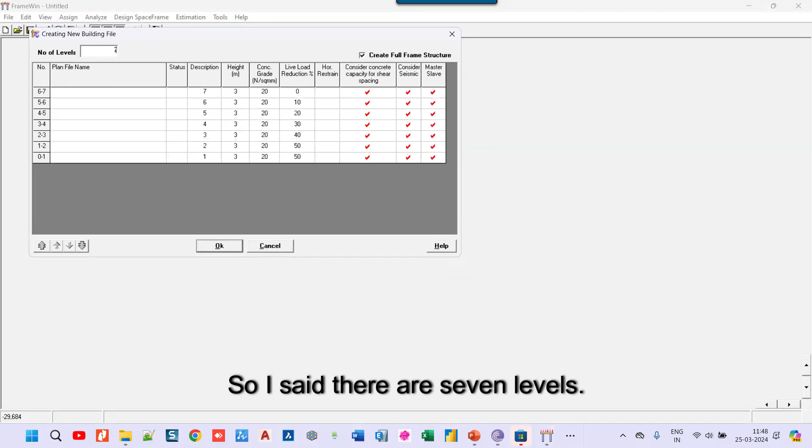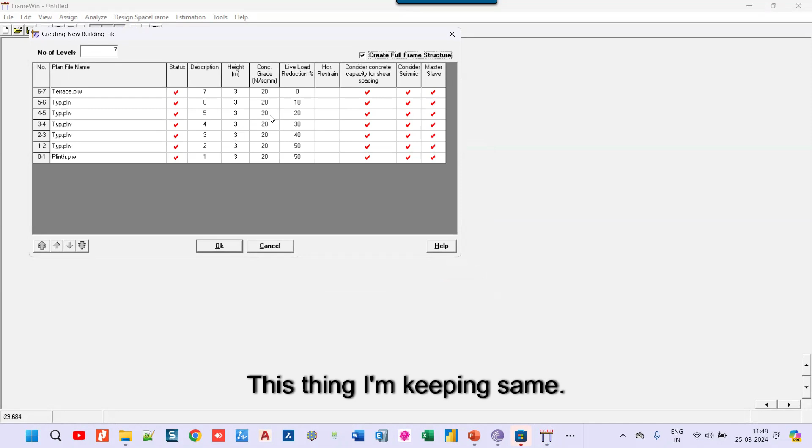I'm specifying to take the top level file from the terrace plan win file, and this one you take from typical, and copy it down all the way. For the ground floor, suppose I want to use this plinth level file. The rest I'm keeping the same. And you unmark this, create full structure, and say okay.

Now I'm giving a file name to this, so I say 'frame' - this is the file name I'm giving. So I'll see the plan, like plan at level 1. I can select and see at which level I want to view the plan.

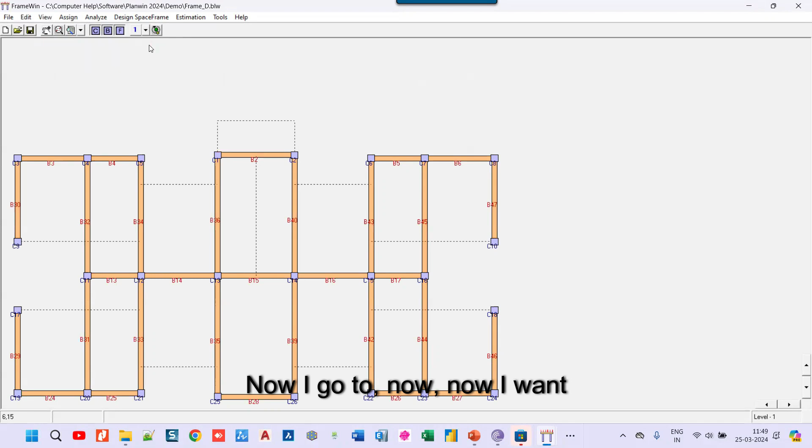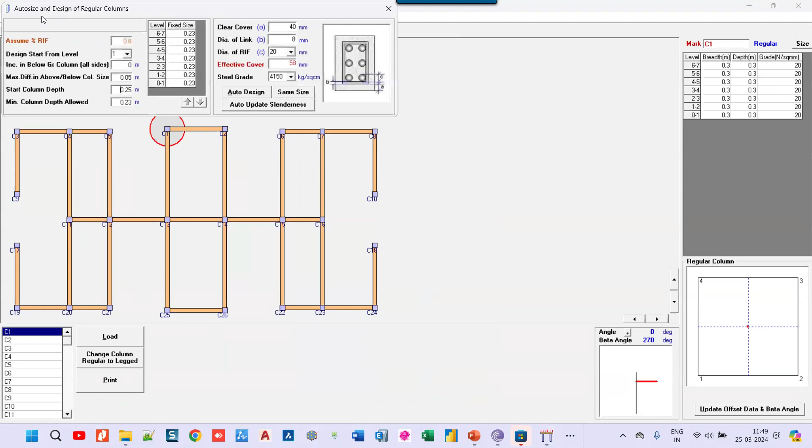Now I want to assign sizing of the columns, so I said assign column sizing. Initially, I want to base my column size on the vertical load. So I go to auto size, and suppose I'm using 0.8% steel to work out the size. Then I click on auto design, and the program works out the column sizes based on the vertical load.

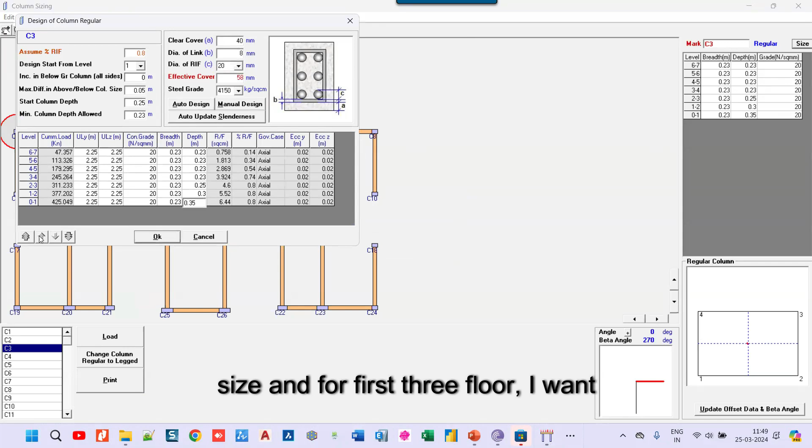Now suppose for this column I don't want the size to vary much. So I decide, clicking on the size, for the first 3 floors I want a size of 0.35, and for the next 3 floors I want a size of 0.3 meters. I click on this and click on up. Now it has created a file with first 3 levels at 0.35 and the rest at 0.3.

Now I can flush this column, clicking on this and this, so my column will become flush. Now suppose this column I want to have vertical orientation, so I click on this, and I want to flush at the top, so I do this.

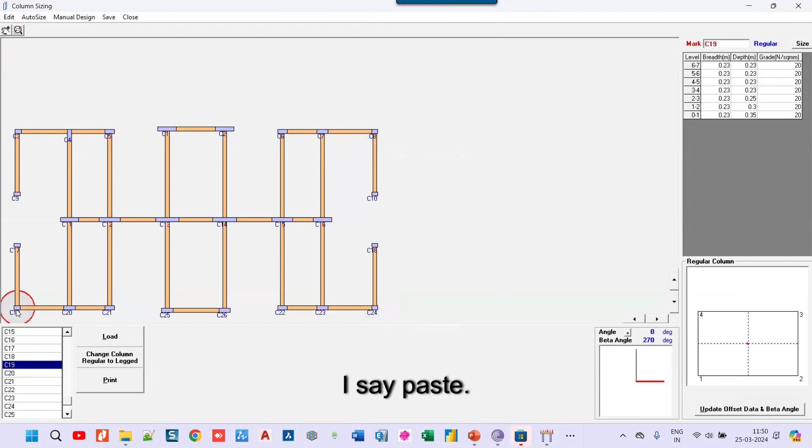Also suppose I want this column size copied to all the corners. So I right click, copy, then go here and paste, paste, paste. So for all these columns, my size has become what I set initially.

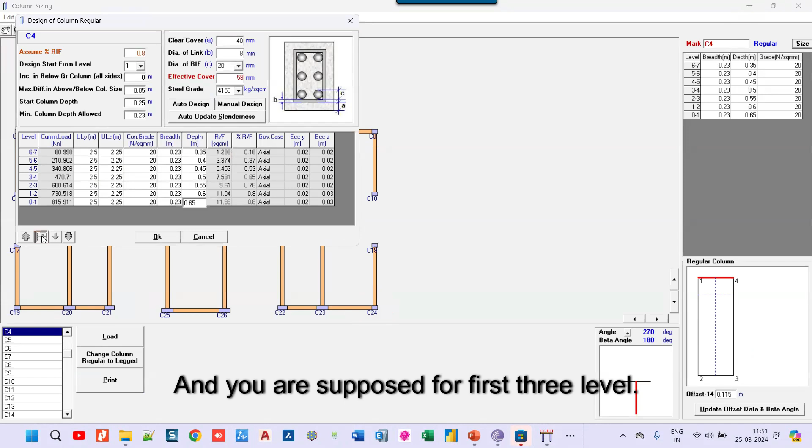Now here you can see these sizes are the same. Now for this column, again I click here and click on size, and for the first 3 levels I want a size of 0.65, and here I want a size of 0.6.

So okay, these sizes are fixed. Again I copy, paste, paste, paste. And here I want to change the direction, so I click here, place it on vertical, and say flush at the top. I click on this, click vertical leg, and flush.

Here also I want the same thing, so I flush it. Now here I want this column to be in this direction, so I'm flushing it here. And here I'm going to keep a shear wall, so I'm not changing any size here. And here again I want this to be flush on top, and for this column I want it flush at the bottom, so I'm clicking on it.

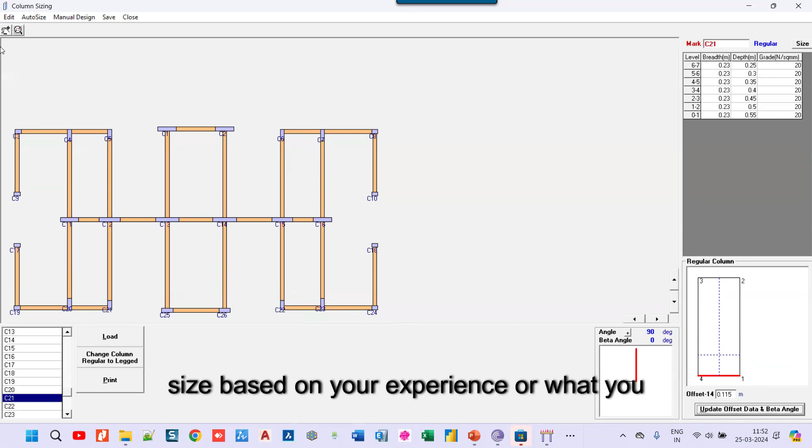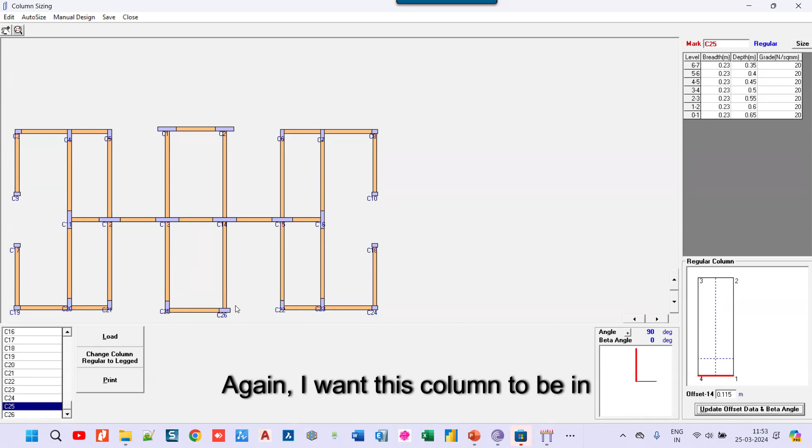So in short, you can change the column size based on your experience or what you want. Now here I want the column in vertical direction, so I click on this, click on vertical, and say okay. Here also I want it vertical, so I click on this. And suppose this one I want vertical too, so I click on this.

Again, I want this column in vertical direction, y direction sorry. This way I've flushed all the columns - this one in vertical direction, this one in y direction, this again in y direction. As soon as I click on this, I get the geometry and whatever I want, I set in this direction. So, okay, and suppose I want to flush it at the bottom or top, it's up to me, whatever I want.

So in short, you can change the direction, and even if you want to give your own sizing, you can do it. Once this is done, I said close.

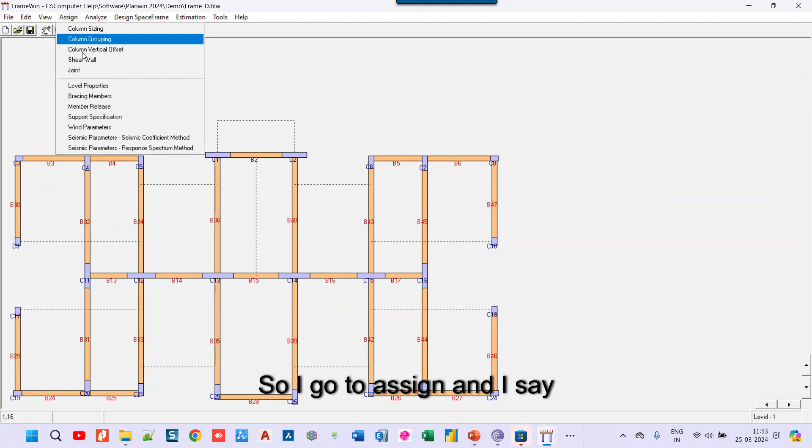Now next I want to mark a shear wall, so I go to assign and say shear wall, and click on these 2 points. Suppose I want the shear wall thickness to be 0.2, I click on this and say okay. Here again I click on this and say 0.2, okay. So this way I've created a shear wall.

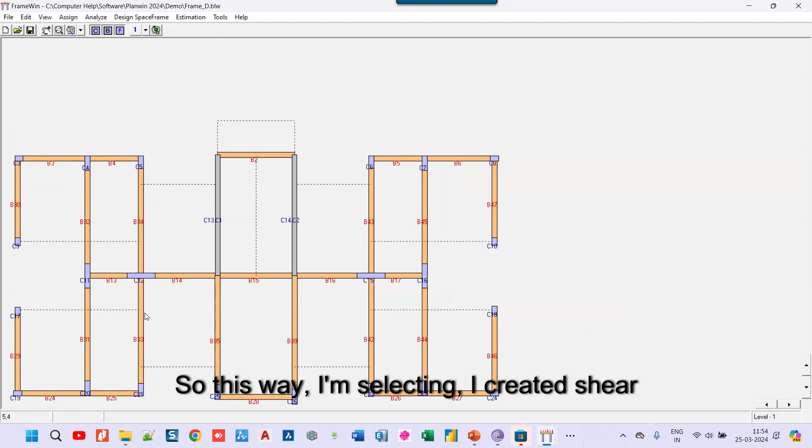Actually, again I want to change the direction of this column, so again I say assign column sizing, and for this column I click on this, flush on this side, go here, flush on this side.

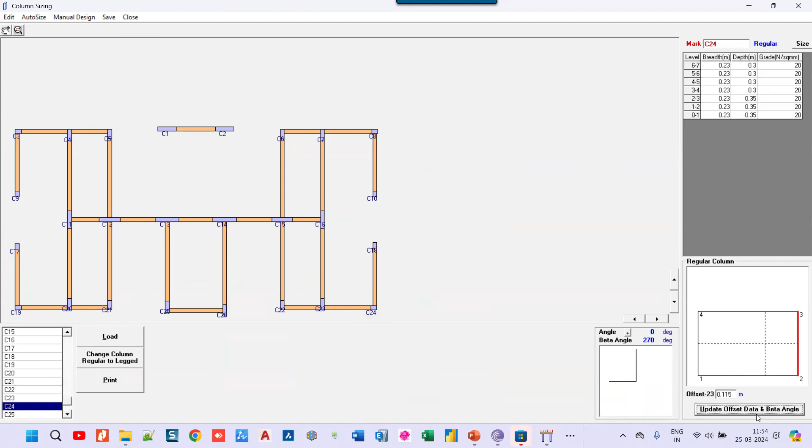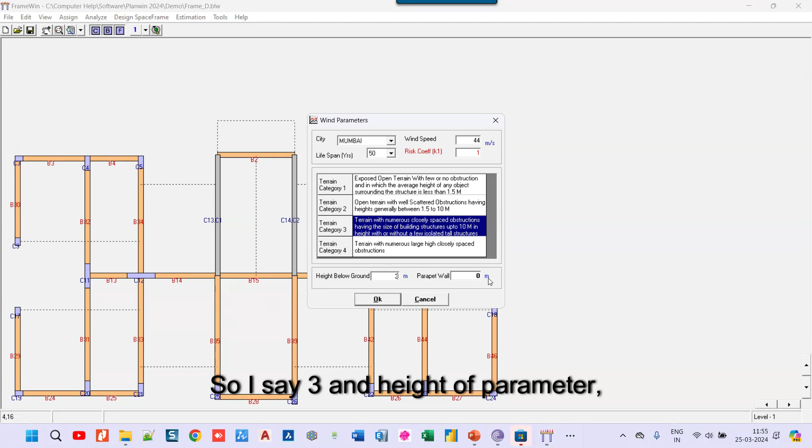So my data is done. Now next, I want to give a wind parameter. So I said assign wind parameter. And I select the city, and based on city, program knows the wind speed, and I'm specifying the terrain. Here I'm selecting terrain 3, and I'm saying height below ground where wind will not take. So I say 3, and height of parapet is suppose 1. So my wind data is given.

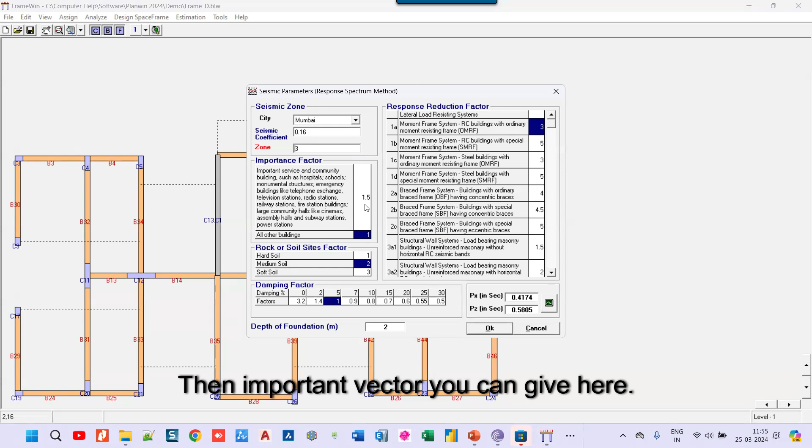Now next I'm going to go to specify response spectrum method. And here again I'm selecting city. Then based on city, select the zone. Then importance factor you can give here. Then what soil type you want. Here I want medium. My damping factor is 5%. And then response reduction factor, suppose I want to give 5. So I click on 5.

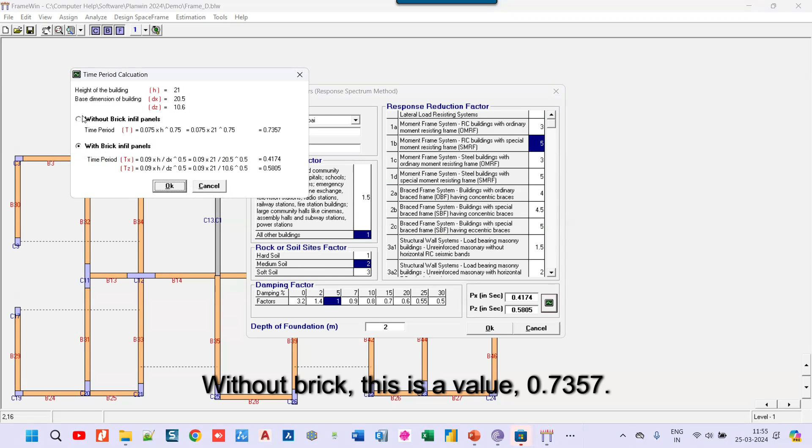And for the time period, I click on this. And it asks whether you want without brick or with brick. Without brick, this is the value 0.7357. And with brick, there are 2 time periods in X and Z direction. So I said okay. Once this is done, I said okay.

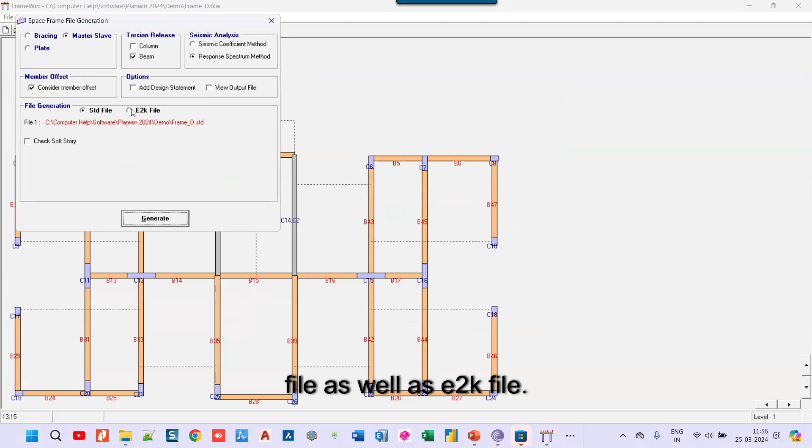Now I said, create the ETABS file. So I click on generation. Now here there is an option to create STAAD file as well as E2K file. Right now I'm creating ETABS file. So I click on here. Again, if you want to create file as per the old code, click on this. And if you want as per the new code, click on this, generate. So my space frame is generated.

Now I'll go to ETABS, start my ETABS, and I'll read the E2K file in ETABS. So I'm clicking on ETABS. So it is loading the software. Then I'm clicking on file. So I say file, import E2K file. And then I'm selecting this file. I said open. I'll get a message version 20.3 is read in 20.2. So I click on OK. It's not going to make any difference. I said OK.

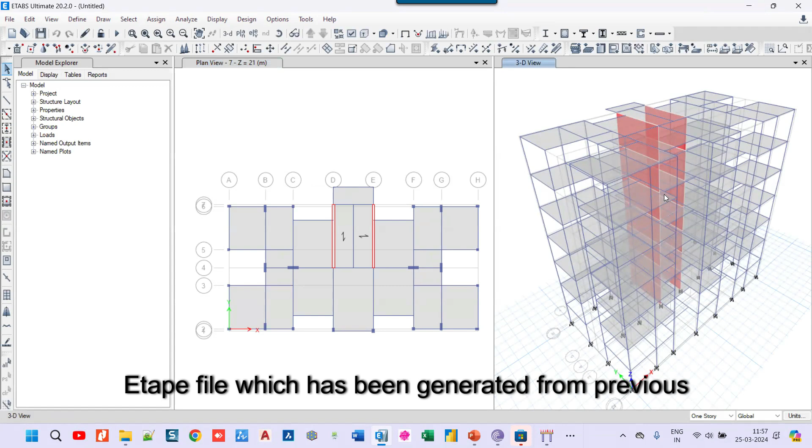So now it is reading the E2K file into ETABS. Now soon you will see the complete file which is generated as per the parameters we have given. So this is my ETABS file which has been generated from FrameWin file. So once this is done, if you wish, you can check all the data. You can go to define material property. So all the material properties have been defined. You can say modify and you can see the property.

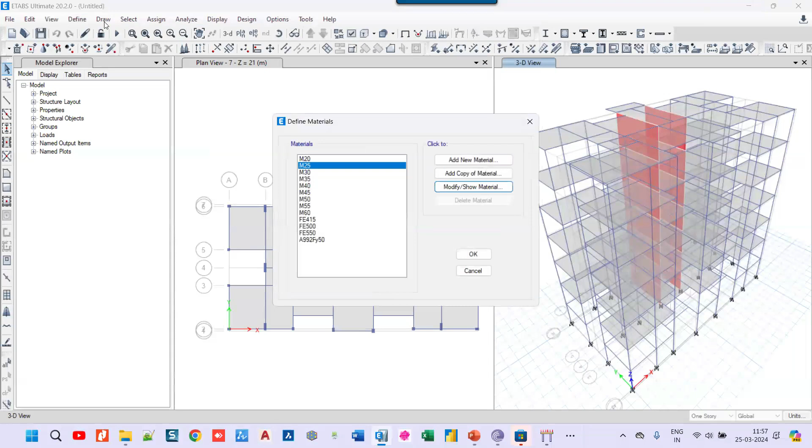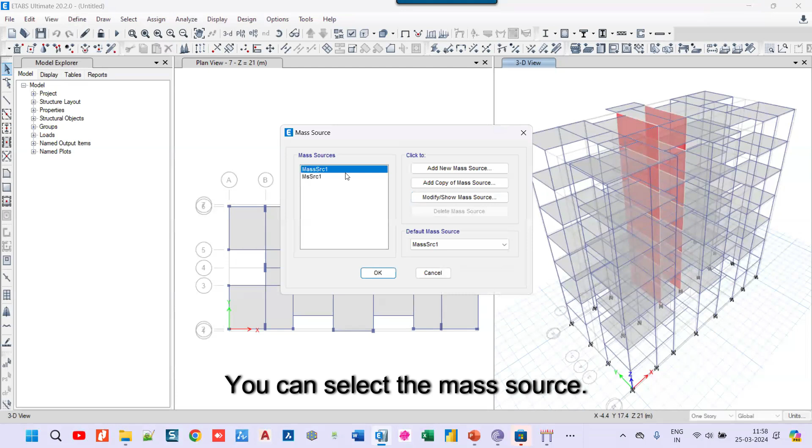Similarly, it has created all the section properties. Then if I select mass source, so it has selected the mass source. You can select the mass source. So this is mass, so it is selected like this. Similarly, you can see the load pattern. So it will create the file as per new code.

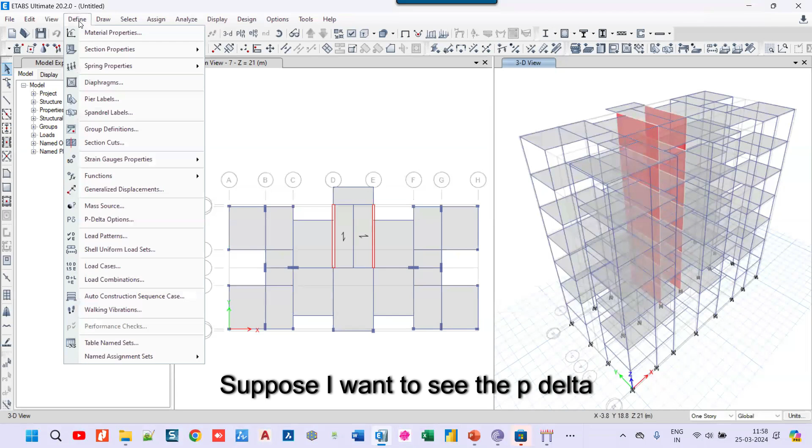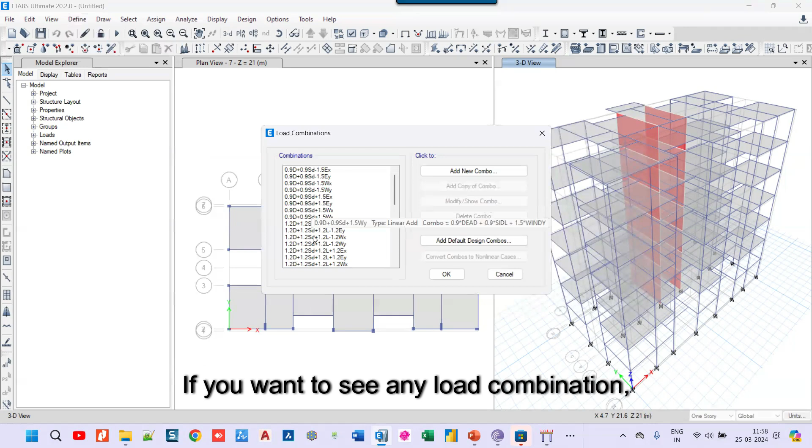I said okay. Suppose I want to see the P-delta option. So here I selected, this is what I generally do, P-delta option. But in case if you don't want to use P-delta, click on none. So you say okay. Then similarly, you can see the load combination. If you want to see any load combination, click here, say modify. So these are the load 1.2 dead load, 1.2 SIDL, 1.2 live load, and minus 1.2 earthquake.

So all the data which you are required to view has been taken. FrameWin created all the data required for it as per parameters given in FrameWin. Once this is done, you can click on analyze. So I'm clicking on analyze, and I'm giving file name as FrameD. So what it's doing is trying to save the model. Now creating analytical model. Now it will do the analysis. It will take, I think, few more seconds.

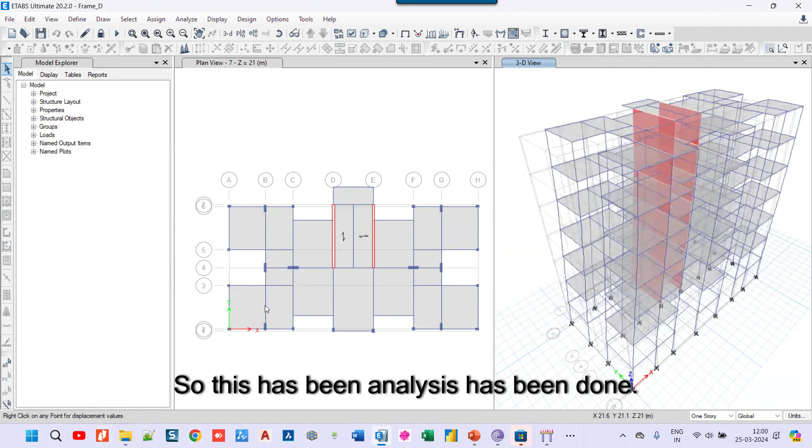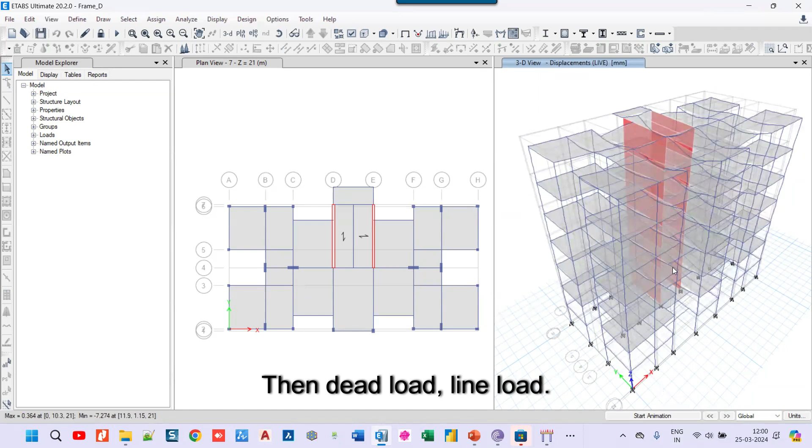So the analysis has been done. Now I can right click on any point and see the deflection. So first it is showing earthquake in X direction. I click on this, it is showing in Y direction. Then wind X, wind Y, then dead load, live load, SIDL, again earthquake, and I can start animation. So this has been done.

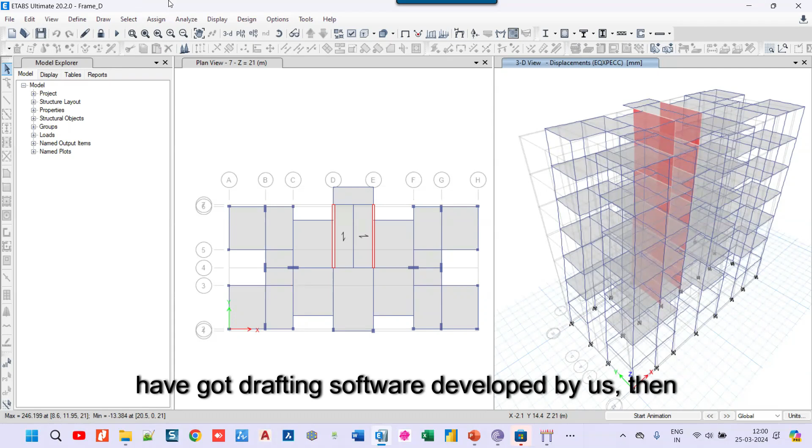Then now, in case you have the drafting software developed by us, you can do the design. And based on this design, drafting will create all the drawings for footing, column, beam, shear wall, rectangular slab, including the quantity, which will be shown in the next video.